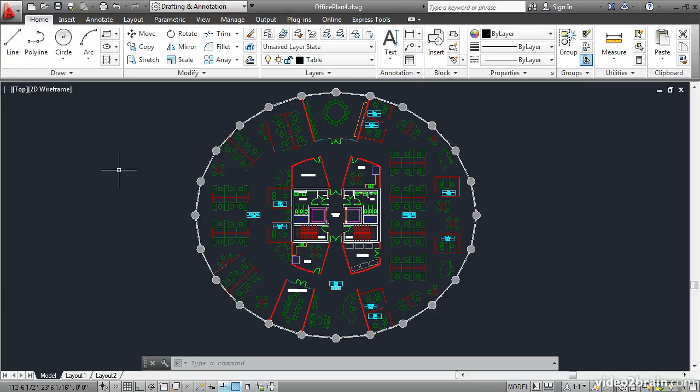Layouts are representations of physical sheets. This layout has a viewport displaying the contents of the Model tab, also known as Model Space. Namely, it's the drawing itself. The layout also contains a title block. You'll be creating a table and placing it in this blank area on the layout.

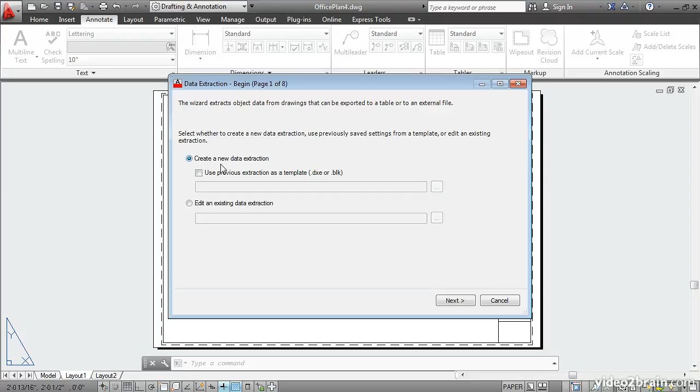Click the Annotate tab on the ribbon, and in the Tables panel, click this tool, Extract Data. This launches a wizard interface which takes you step by step through the process. Let's create a new data extraction and click Next. You're prompted to save a file.

In this case, we're going to be extracting data from the room tags, so let's just use the name room tags as the file name here. It will save it with the extension .dxe. We'll take the default option here to use the drawing itself as the data source. Click Next.

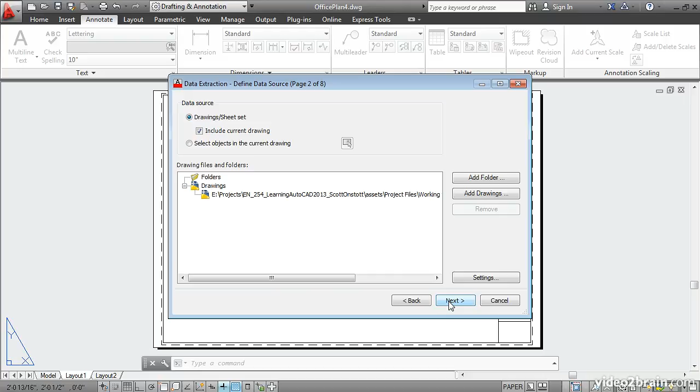You're presented with a list of objects which you could potentially extract data from. Right-click on any one of them and say Uncheck All. Scroll down and select Room Tag. Then click Next.

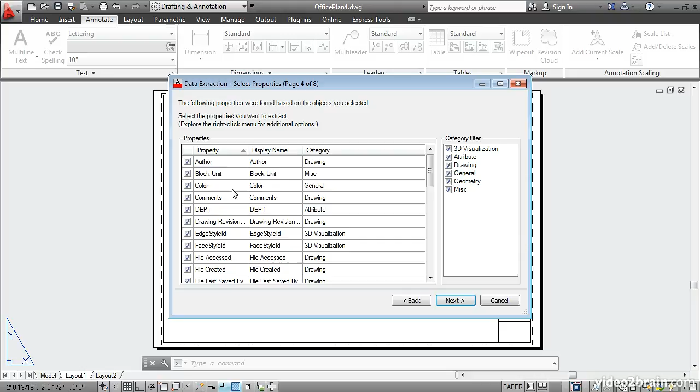Here's a list of all of the properties that could be extracted from the room tag. We're just interested in its attribute values, so deselect all these categories except for attribute. Click Next. This is a preview image of the actual table that will be created. We don't need to have a count and name column, so let's uncheck these here and here.

You can also sort the table by clicking on the headers. Here I can sort the department list in reverse alphabetical order, or I could sort the room number in forward order. Just click the header again to sort in reverse order. I think in this case I will click the department header again to sort in alphabetical order.

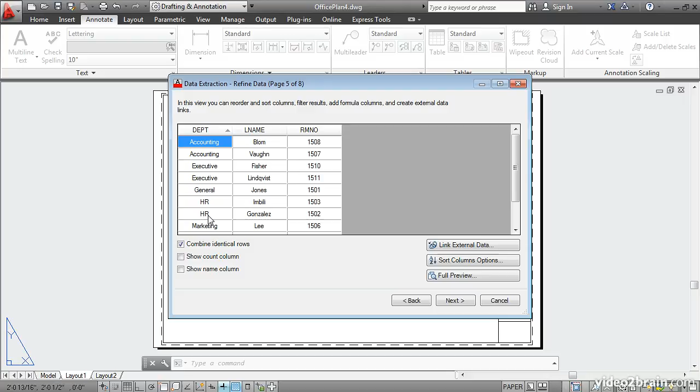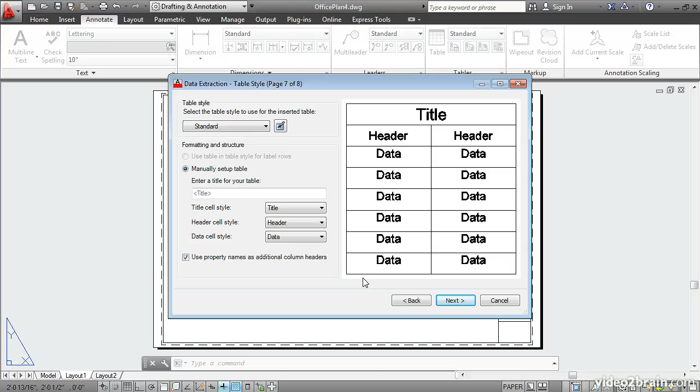Click Next. And then here we need to insert the data extraction table directly into the drawing by selecting this option. Note that you also have an option to output the data to an external file, which could be used in another program. Click Next. And here we'll accept the standard table style, so click Next. And finally click Finish.

There's a representation of the size of the table here attached to the cursor, and the last thing we need to do is just click a point to insert that table. Zoom in, and you'll see the table is populated with attribute values that came from the drawing. It even includes the invisible attributes, which list the department.

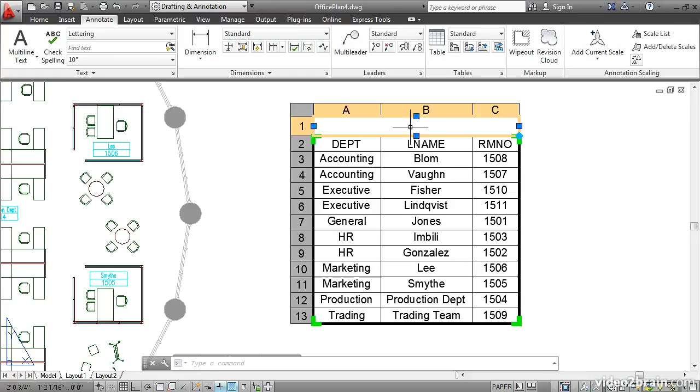We need to edit the table and add some text for a title, and we'll also change these header names, which right now are displaying the attribute tag names. Double-click in this cell and type Room Schedule. Press Enter, and then double-click on the Department cell.

Notice there's a lock symbol next to the cursor. We need to unlock these cells before we can edit them. Hold down the Shift key and click on this cell so that you select all three header cells. Right-click and choose Locking, Unlocked.

Then double-click on DEPT, highlight that text by dragging over it, and type the full word, Department, and press Enter. Double-click on L Name, highlight that, and change that to Employee. Finally, over here, highlight this text and call it Room.

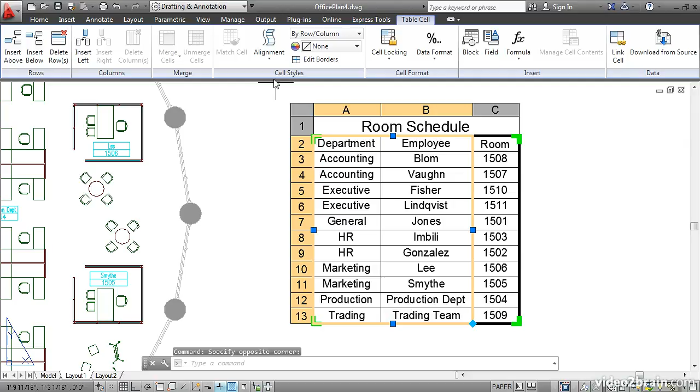You can also change the alignment of the cells. Click inside a cell, and then click on its header, in this case B, to select all of the cells in that column. Hold down Shift and click the A column as well. Then up here on the Cell Styles panel, open the Alignment flyout and select Middle Left. Click outside the table to finish editing it.

So you've learned how to extract attribute data and how to automatically create a table displaying this information. You also learned how to edit table cells and change their alignment.